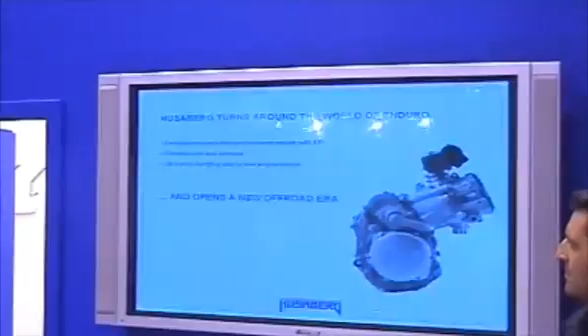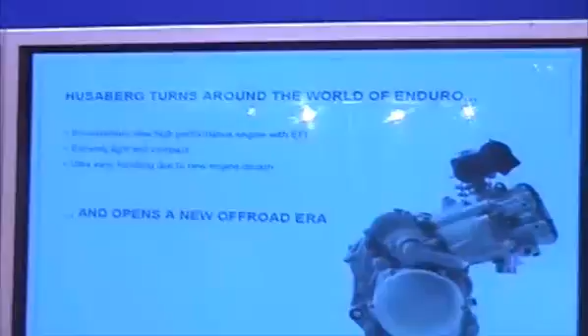As you can see on the screen, we have a completely revolutionary new engine in this new bike. Husaberg turns around the world of enduro, and this is absolutely true. It's a brand new engine with EFI - extremely light and compact, in a very nice package. Ultra easy handling due to new engine design, and it opens up a completely new off-road era.

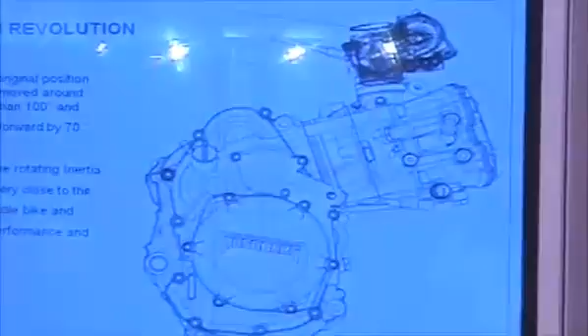This is absolutely true. The engine design revolution is partly visible here - you can see the engine, keeping the clutch in its original position. What we have done is move the crankshaft axle up to the upper part and back, more than 100 degrees, and the cylinder was at the same time leaned about 70 degrees. As a result, the rotating inertia of the crankshaft is now very close to the actual center of the bike, and this helps tremendously with the handling. It gives a completely new feel of an off-road motorcycle, never seen before in the industry. So this is really optimized performance, and the handling is dramatically changed.

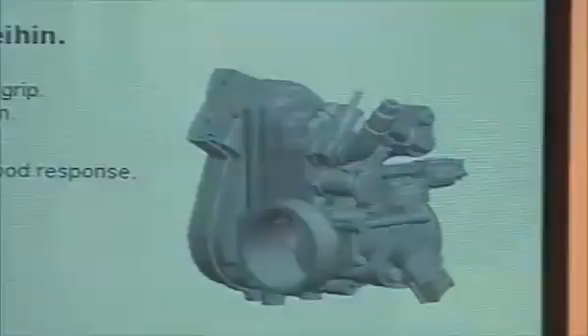We also have EFI, as I mentioned earlier. There is a state-of-the-art engine management system with electronic fuel injection, made by Keihin. The throttle body is 42mm, and has automatic choke, temperature and altitude compensation. But not only that - it also has a direct response from the throttle, so it reacts immediately upon opening. It's a perfect setting for any kind of riding, with no bogging and no hesitation, very good response. Smooth enduro-specific power delivery is what we can guarantee from this combination.

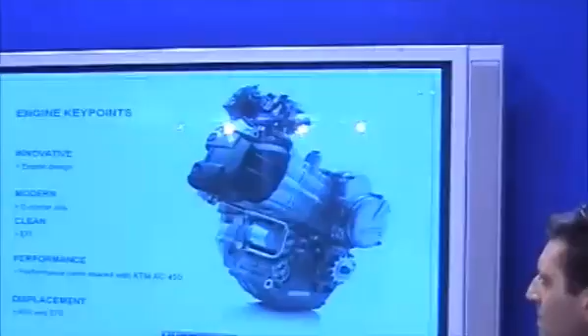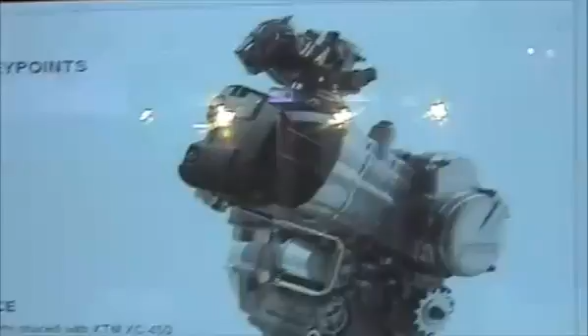The engine key points: it's very innovative in design, and has e-starter only, which is the future of enduro. It's very clean with the EFI, and performance parts are shared with the KTM XC450 - internally the same parts as KTM 450s. The displacements we have now are 450 and 570. The engine design benefits are definitely easier handling, minimal weight, highest reliability and ultimate performance. This is really what we tried to achieve with this new bike - we wanted to make it the best of the best, really special.

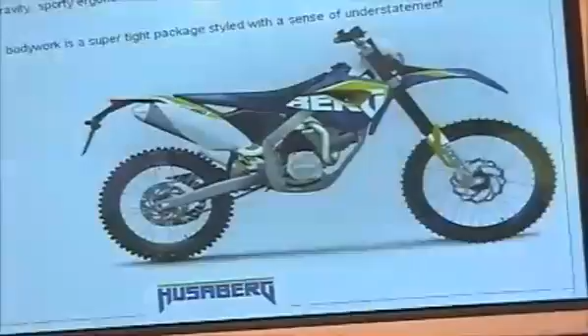And now I hand it over to Sebastian. Thank you, good afternoon. Our target was for this bike to be a complement to the Husaberg heritage. This brand has a strong heritage, and as a designer it's always a challenge, but at the same time an exciting experience, to transfer all this heritage and technical feature into a new design. So we wanted to achieve a low center of gravity, sporty ergonomics, and the typical Husaberg feature like the see-through under the seat.

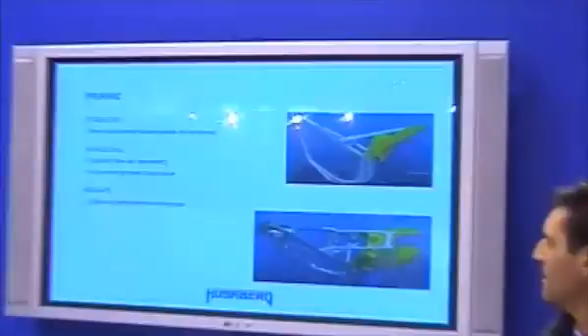There are several things we wanted to express on this bike, so we worked together with engineers to create a very tight package. There's several new features, let's call it real innovation around the frame, as we've seen before around the engine. If you look at this chrome moly frame, in order to host this new engine with a quite different layout, we needed to work around the perimeter and push it upwards, which has several benefits we'll talk about later. We wanted to reinforce the handling, so we have real state-of-the-art geometry.

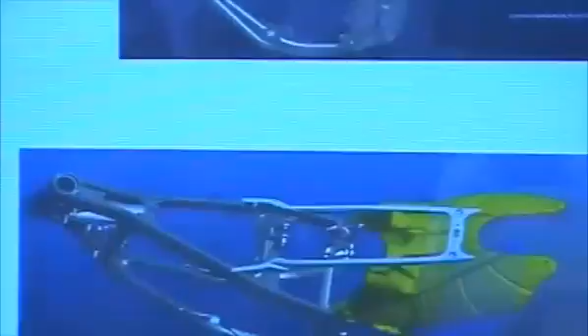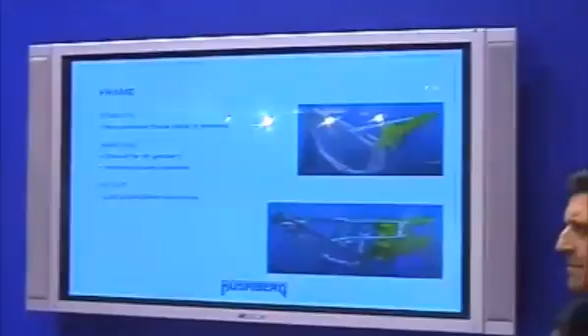This bike has a nearly 250cc enduro racer geometry, but also a 450 engine. As an enduro rider, you already know what kind of benefit this will bring. There's improved ground clearance, again due to this shifted engine and gearbox. Then the weight - obviously, as a racer, you want the bike to be ultra light, and to achieve that you have to work in several areas.

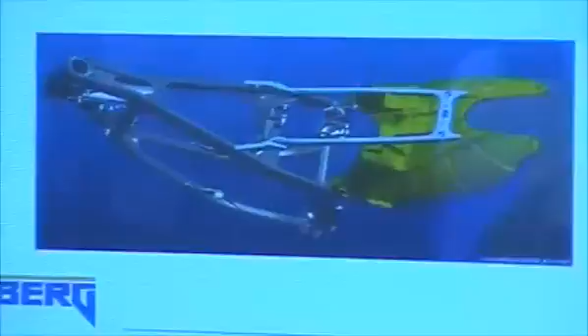One area of real true innovation on this bike is the polypropylene monocoque in the rear. This bike has no subframe - it's got this, let's call it plastic monocoque, but plastic nowadays is developing and is really high-tech. In reality, this allows us to play with the last millimeters to achieve rounded edges, better ergonomics, a very tight bike with a very good grip between your legs.

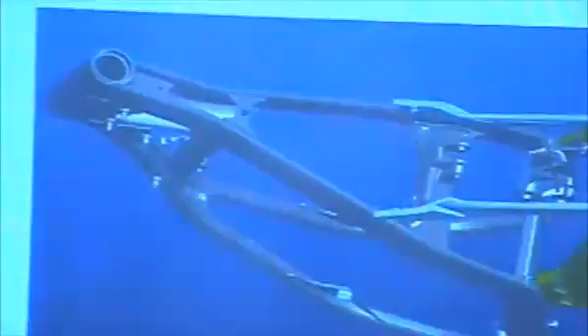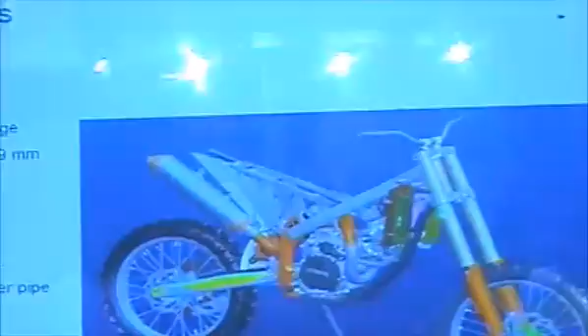The chassis - again, this new perimeter frame has a very straight beam, and as you can see in the pictures, it's small. The PDS shock is directly mounted at the same angle as the frame, directly connected to the head. So the forces are sent to the frame in an optimum way, and this allows the frame to be even lighter while having the same stiffness. The shock works better, has greater travel, so this is all a benefit for the handling.